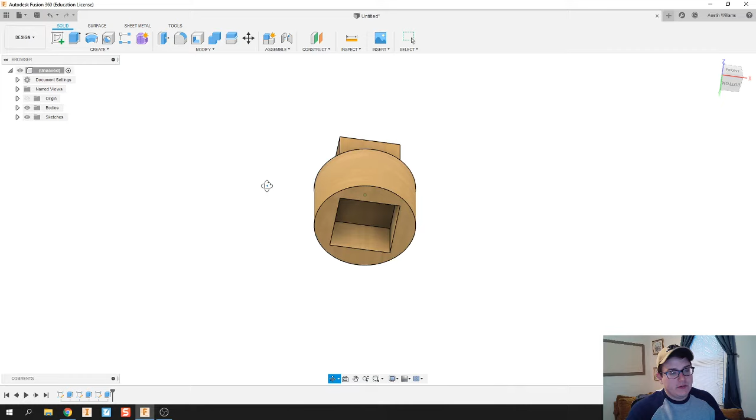The first piece I'm going to be working on here is just how to extrude in Fusion. I've got a circular peg here with a square insert on bottom and a square tooth right out on top. I'm going to go ahead and save this project, and we're going to call this 01 - simple shape extrusions.

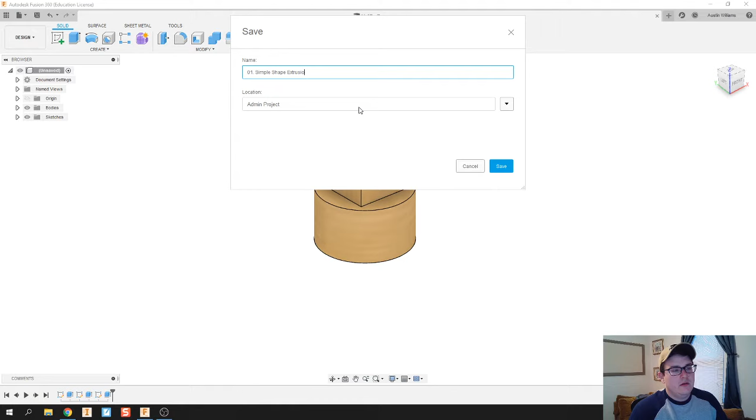I'm going to go ahead and start a new design and create essentially the same thing. When you open up the Fusion package, there's a lot of different bells and whistles. We're going to focus on just one, what you can do with it, and then move to the next steps from there. You're welcome to, I actually highly encourage, click on the buttons and see what's going on. But I want to keep this very specific and very guided on what we're doing today.

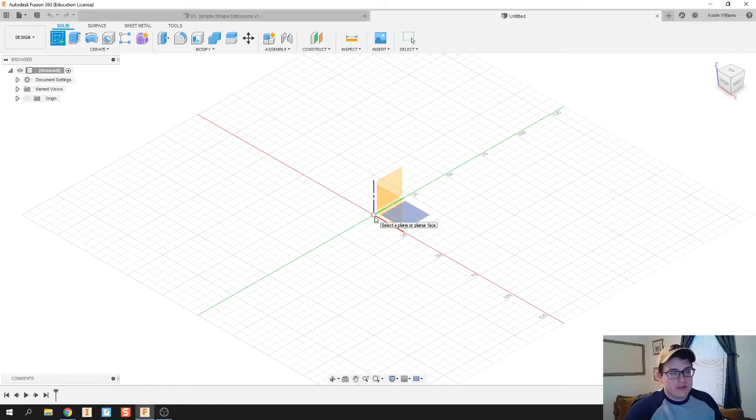So under design, we're going to create a sketch. You'll find that this three-dimensional plane will pop up. For now, it really doesn't matter which plane we start our sketch on, so I'm just going to click one. And then I'm going to make my first solid.

In order to make your first solid, you'll notice up here on the top left we have solids. The cool thing about using solids is you can do lines - there's some interesting features there with lines. You can do squares, circles, or some sort of curved shape if you're following an image, and so on and so forth. We're just going to play with squares right now.

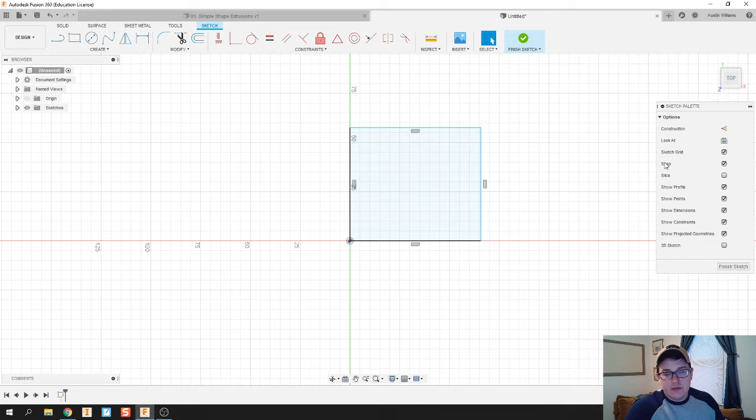Over here on the right side, you should have this pop-up window. There's a couple different rectangles you are able to use, one of those being you can just pick the two corners of your rectangle. Now this one can be helpful from time to time, but what I actually recommend is going back to rectangle, center of rectangle, because this allows me to fix my rectangle to the origin plane. For reasons we don't quite get into in this video about how helpful that is, I personally tend to use that a bit more because it automatically adds a lot of geometric constraints.

Now on top of that, I just made my rectangle, but let's dimension it. I'm going to hit some shortcut keys every once in a while - I'll hit the D key on my keyboard, and this allows me to dimension my rectangle. I can dimension it to 50 millimeters, or if you're doing inches, you could just type in 50 inches as well, and it will automatically adjust it to scale. So let's just keep that at 50, and then let's go ahead and dimension the side piece as well.

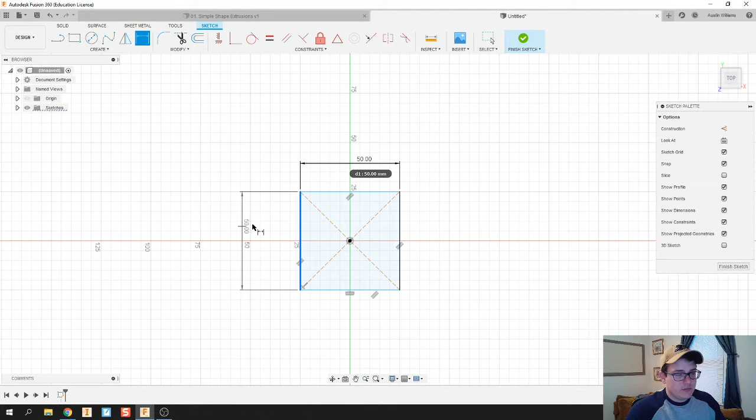All right, I'm going to go ahead and finish the sketch. And then let's extrude this.

Now in your extrusion panel, you'll see this little arrow pop up. You're welcome to drag this arrow around either way you go. But I'm going to pop open my extrusion panel over here on the right side, your panel pop up. You're welcome to drag it wherever you want.

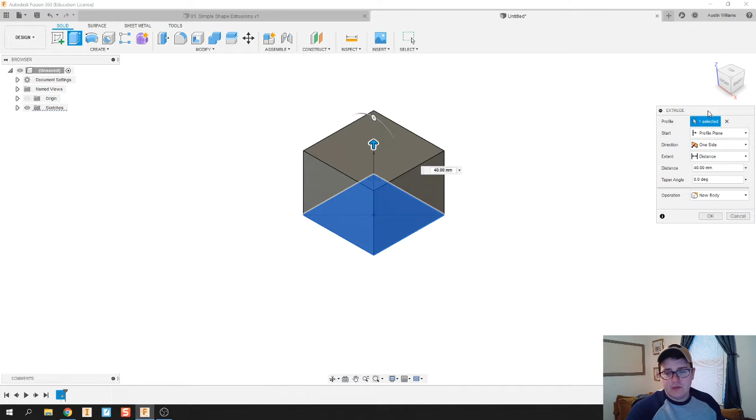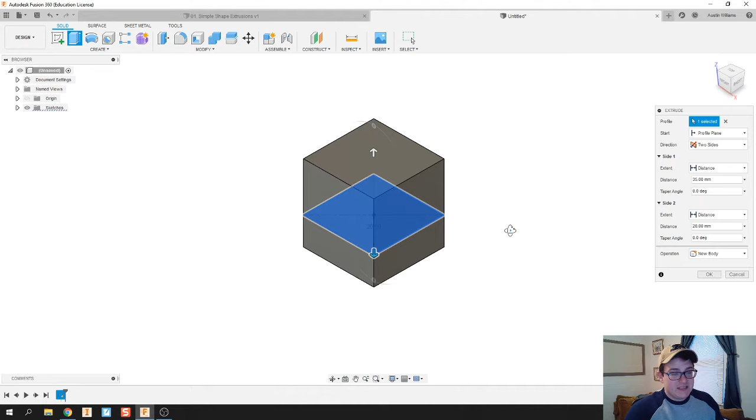I'm going to talk a little bit about the types of extrusions you can do. You can do a one-sided extrusion where your extrusion goes from one side of the sketch up or one side of the sketch down. You could do a two-sided extrusion where you could have your extrusion go different distances for different lengths. That's totally fine.

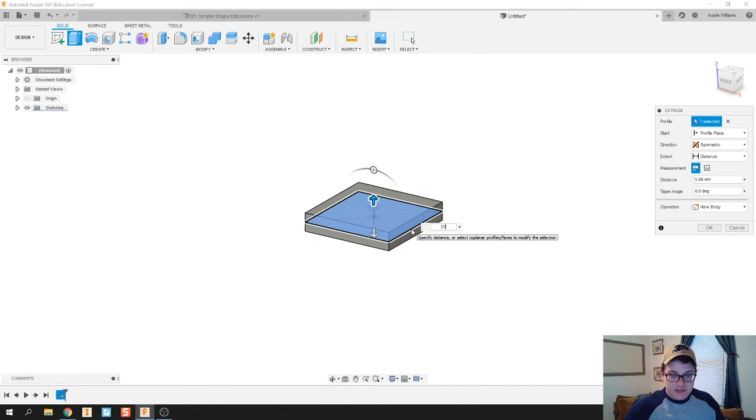Or you can do a symmetric extrusion. For the sake of what we don't get into in the long run, I'd recommend just go ahead and start using that symmetric one, because that keeps your work planes and your sketches in the middle. For reasons we don't get into in this video, I imagine that's going to be helpful later on. So let's just make this a 20 millimeter thickness from the center, and there we go. Alrighty, next piece I'm going to do is start a new sketch.

So over in the top left, I'm going to start a new sketch and just click on the face that I want to work on. And so now I'm on the face of that cube. And then let's go ahead and look at what we have going on here.

Now, if you notice, I'm rotating this thing pretty freely. On the keyboard, how am I doing that? I'm holding down the Shift key and the mouse wheel, and you'll notice your cursor turns into an orb, so it allows you to rotate your part as you want. And so with that, I can rotate it however I want.

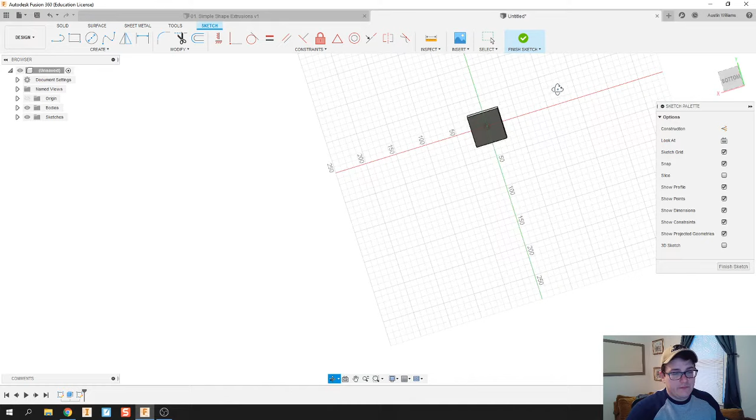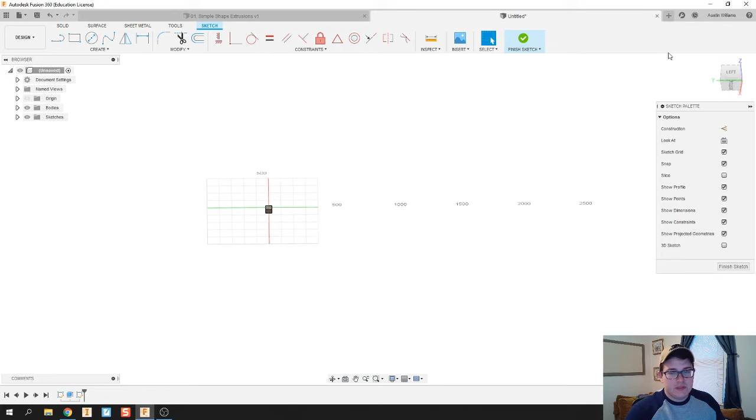Now, sometimes this can get a little hard to get used to. So if you totally get lost and you don't know how to fix your piece, and say I'm way over here and I keep trying to fix it, up here on the top right you'll notice you have an orientation. You can go ahead and just click on that and click on the home button, and it will take you all the way back to your original piece. The home is defined as an isometric view very specifically, and so if you ever get lost, just click on that view cube, and up in the home button, it'll take you right on home.

Alrighty, so I'm going to go back to my top, and then we're going to put a round peg in here. So you're going to notice after a while, I'm actually going to stop clicking on these buttons up here, and I'm just going to use the keyboard. So I'm going to click center diameter circle, just hit the C key, and this allows me to make my circle.

Now, when you just throw a shape in there, it needs to have a dimension. It has a dimension in there, but it's not defined. It's a loose definition. So if you notice that some of your shapes are different colors, you see right now it's a lighter blue color. It is an undimensioned shape. Now I'm going to hit the D key and go ahead and dimension it. And if it wants to be 40, cool. I'm just going to make it 35 millimeters.

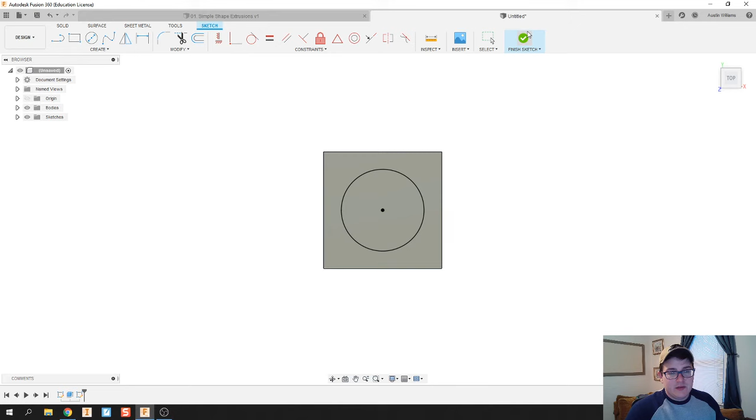Click Finish Sketch. You can click Finish Sketch up here with the check mark, or down here. I'm going to just go ahead and click up there.

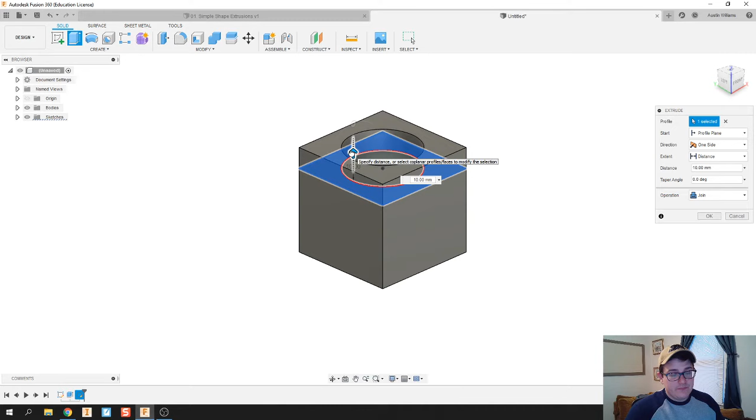I believe I'm ready to extrude. When you click on the extrusion button, you can highlight which face you want to extrude. On my geometry, I can extrude this outside piece, or I could extrude this inside piece. Either one is up to you based on what you're looking for. I'm specifically going to make this circular peg, so I'm going to click on the inside, and then drag that up to where I want it to be. 20 millimeters looks fine. Now I've got my piece.

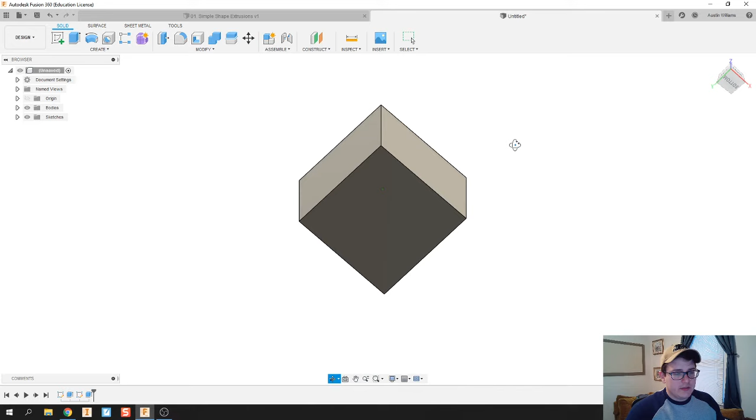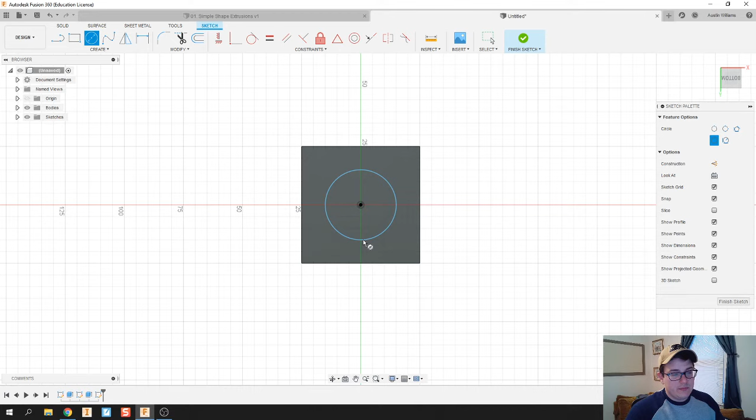Let's look at the bottom side. Getting used to rotating around, I'll hold Shift and use the mouse wheel to rotate my piece downwards. I'm going to click on New Sketch, and click on the bottom of my cube. Hit the C key to make a circle, hopefully the same dimensions as my circle above. But I forgot that, so let's see what we have here. I'll hit the M key, and actually finish that sketch first.

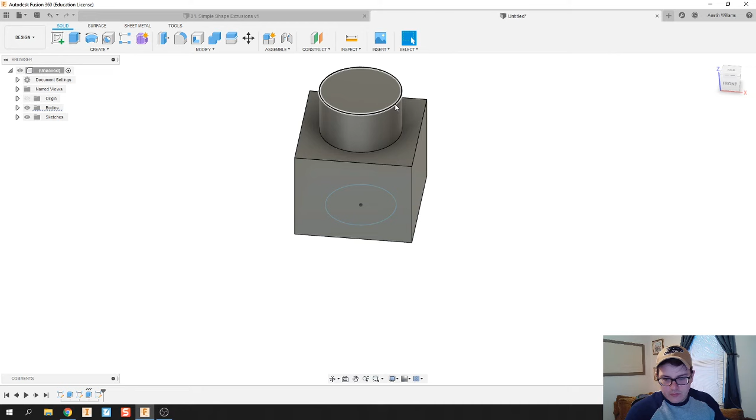M key allows me to measure. Should be, at least. There we go. 17.5 is going to be a radius, so my diameter is going to be 35.

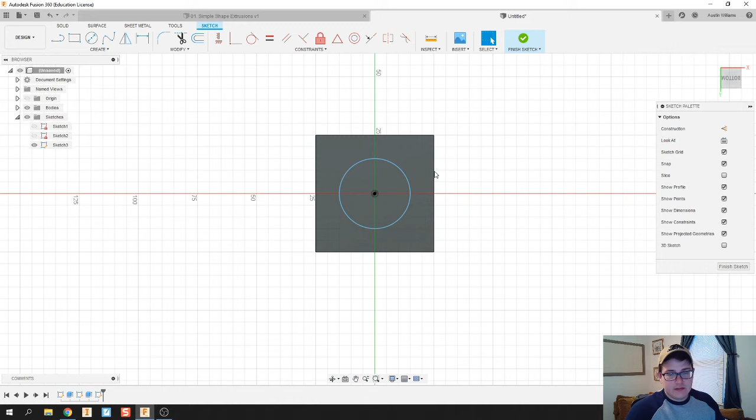So I'm going to go back to my sketch, Sketch 3, and here we go. Now on top of that, I'm going to dimension this sketch to be 35 millimeters. Click Finish Sketch, and I'm going to go ahead and extrude.

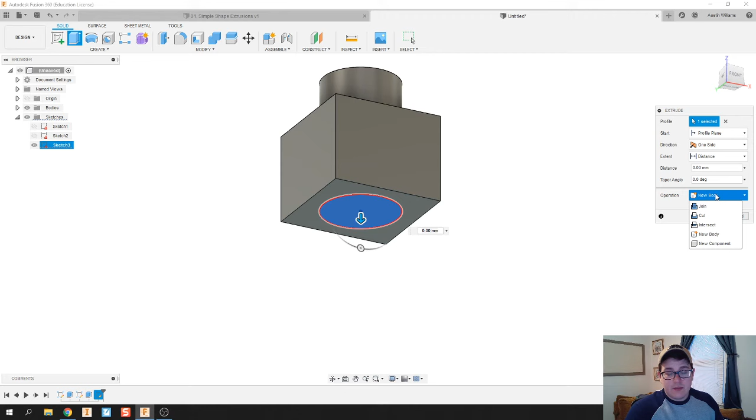Now the type of extrusion I'm going to do here is different from the other ones. I'm going to click down here on operation, and then add to cut. Then I'm going to cut inwards to 20 millimeters. Click OK, and then I am done.

If you noticed on that piece earlier, it was a different material than what we had here. So what I'm going to do is make this a different material. I'll highlight my whole area, right click, and click physical material.

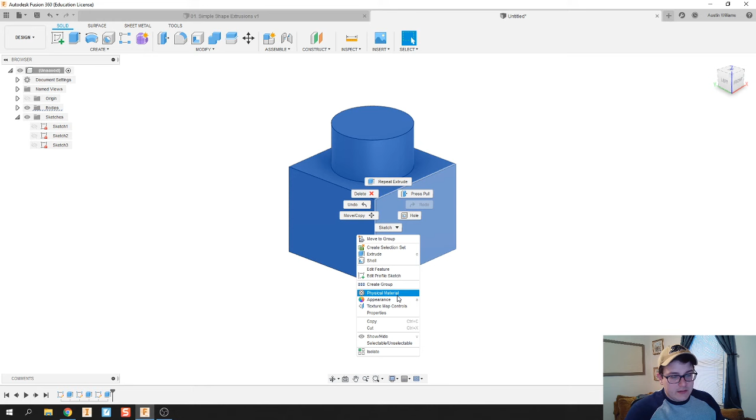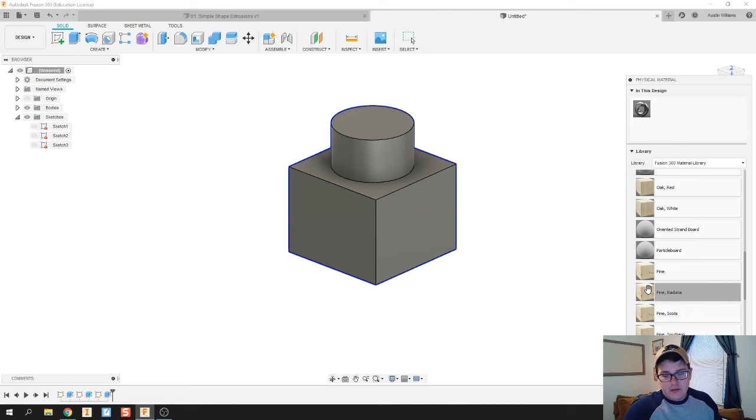Depending on if you've played around in this material library or not, this might look a little different. I'm just going to minimize all my folders. You can click on whatever you're looking for here, and I really like the way some of these wood textures look. So I'll find one I like, hold and drag it over, and boom, there we go. We now have a pine piece - I'd call this just a simple extrusion block - and then we're good to go.

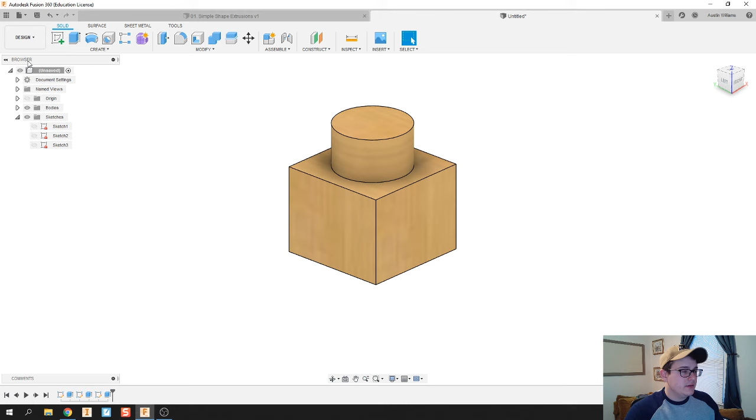Before we wrap this video up, let's look at a couple of things we have going on here. Off on the left side, in this model panel, it's called your browser ribbon. It has a couple of things that might be helpful for you to organize and understand what's going on here.

In my origin files, we might need to use these planes later on - that's my X, Y, and Z planes based on my part. We have the bodies we've made, and then we have my sketches. This might be the most helpful thing for you to use when making a part, like figuring out where a sketch is at. If you highlight over it, it will show you where that sketch is. And if you want to, you can temporarily view the sketch by clicking on this eye icon, and it'll show you what's going on.

Alright, cool guys, we made our first piece.